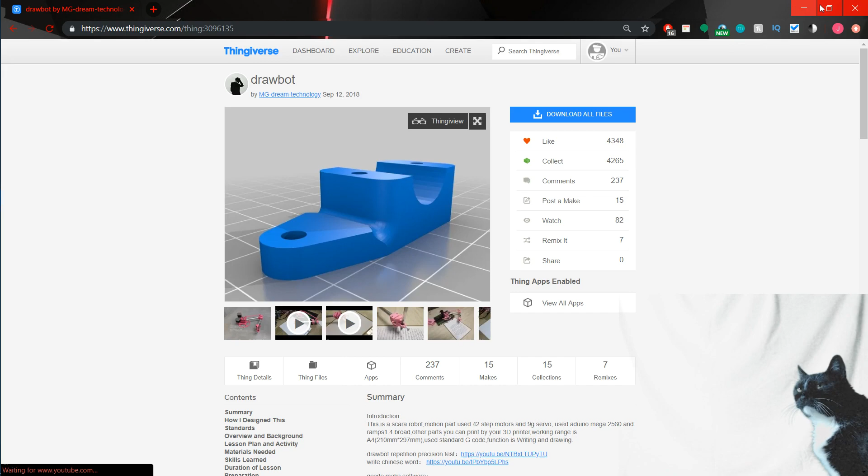And use it to do manual computer input to wipe computers automatically. I'm gonna have them click into a system. It'll know what type, what size they are, all that stuff, and then do the whole process. Let me get this out of here. Oh actually, I was gonna show something. Yeah, so that automates away a good part of my job.

So this part here, I printed most of these parts already, and these are actually printable on a smaller printer, so that was really nice to be able to get that done. I did not print this base part because I'm going to make a specific base to fit computers to slide them in. And then I wanted to make this more 3D printer friendly.

Can this be like a nicer... that's not much better. I wanted to 3D print these parts here because I didn't want to buy a pipe and then buy a saw to cut the pipe or anything like that. I just wanted to print the whole thing.

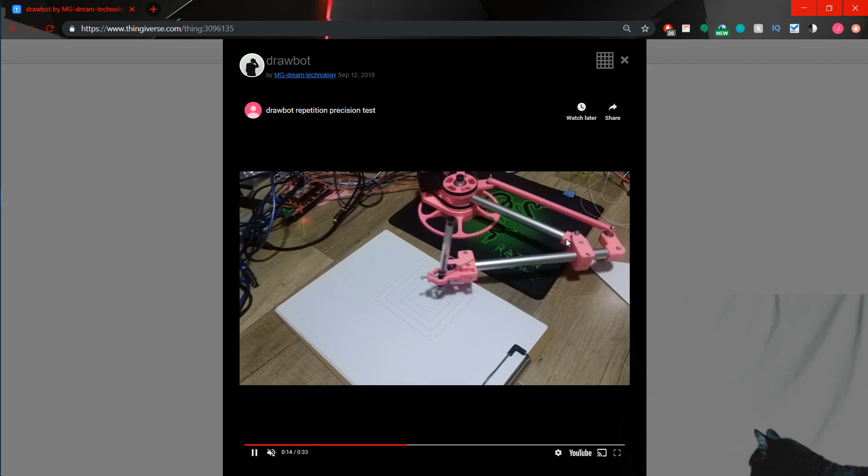And if I just redesign more of it, I probably can't do this. If I design more of it, I'll design it with less screws that are different sizes. There's like 10 different types of screws that are different sizes in this contraption here. So this screw and this screw, I just got the same size. This one, I guess that's one size, but I believe that they redid how this works.

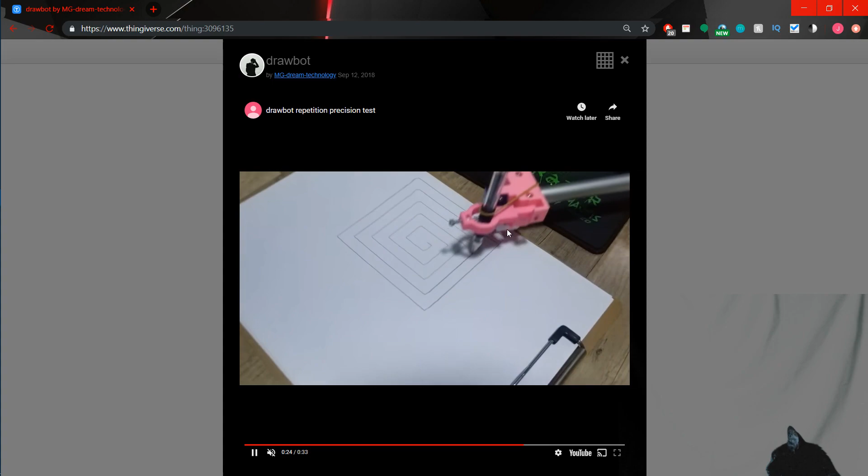So that it pushes down on the pen and is kind of like a better... yeah. So this one, it's got kind of like casters that it goes up and down in, and I think that would be better to press the keys on the keyboard. I might even redesign this entire part here, so we'll see.

But tonight I really wanted to do the arm bars. So basically I printed both of these already. One of them is 200 millimeters, one is 170 millimeters, or whatever. I printed those, but it looks like these joint pieces here and joint pieces here, they slide into the aluminum, so the inside of those has a certain tolerance that I was not aware of. I thought they bolted onto the sides or something. I didn't really understand how those worked.

Are all these the same picture here? So this part here has to be flared out, and we're gonna make that, and then I will print it shortly, and of course post on Instagram once I have that printed.

So let's get started. Let's do a sketch. We're gonna pick our plane. So what we're gonna do, do I remember how to do this? Let's do none of that stuff. Sketch line. Okay, if you could see this drawing on this iPad, you would laugh. It looks like a Y shape, so it almost looks like a slingshot here.

Okay, so we want to start with the midpoint here. We want to go out 7.5. Okay, then can we grab this guy? No, we want a repeat line. And we'll go here. And we want to do, so the full length is 200. We want to flare it at 20 millimeters. And so let's do 180.

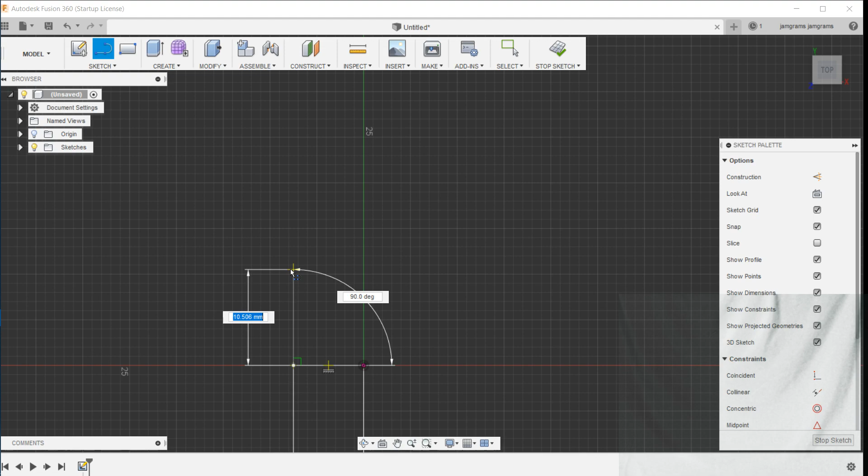Okay, so that should be good there. Oh I forget how to... oh yeah, okay perfect. Perfect, so that's 180. We're gonna rotate this around itself, so don't worry about any of that. Okay, so what did we need to do next? We needed to go up 20. Can we just repeat line here? What's going on?

20. And then what we want to do is flare this out, so that the inside is 12 across. So let's see, what's the total? So I wanted that to be 4. So that's 16 wide. So we need to do... can we just do 20 wide? Does that make sense? No, that would kind of look bad.

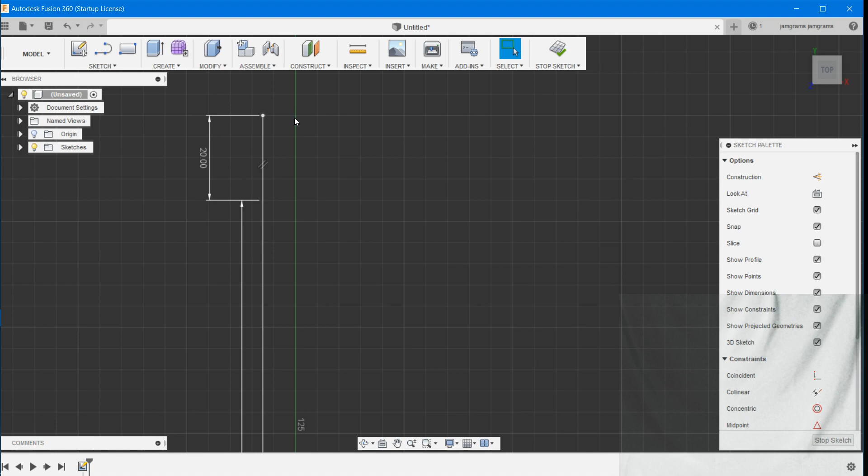That is not what I wanted either. Well, can we do a line? Yeah, let's do the inside.

So that's 7.5, so we need to do another line here. Repeat line. Then we'll go here to here, and we want half of 10, so that's 5. So then we want another line, then go up 180. Okay, then we can get a look at what's going on here.

I think I need to turn measurements off. Where's the view? I changed the view. Show dimensions. Okay perfect, so I don't need that yet. Oh, nope, nope. So what are we looking at?

So this is where it would flare to 12, so it just flares out 1. That's not actually that crazy. I wonder if we could get away with 12 internal diameter and 15 external diameter. I wonder if we get away with that, because then I'm not going to have to flare this at all, and we could just...

It seems mighty thin, so let's repeat a line. Oh, that's not what we want. We just want a line. Okay, and we want that line to go well, 45 degrees, right? But... 0.7, 1.5.

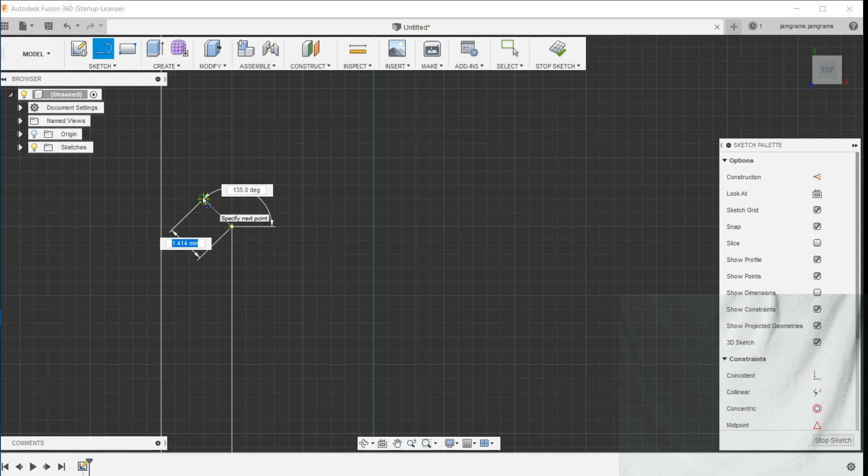So then that will be 13 millimeters, right? Because we're going from 10. So we really want 1.5. Really want about 1.

Can we get... interesting, I did not suspect we would have this issue. Because I didn't do much calculation beforehand either. So that one is 2.5 on each side.

What? Hold on. So my original... so what's my spacing there? I love how I turned off the dimensions. Okay, so that's 5.

So that's 2.5, the width of the pipe here. Not sure why I need to beef it up so much on the other side. So let's just try and flare it from where it is. Because that's 7.5. How about we

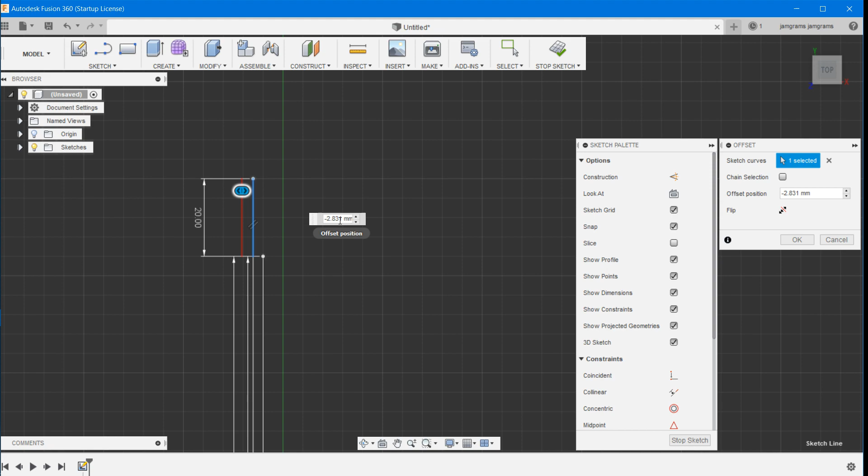kind of just offset? Is that O? Yeah. Let's go this direction, and we want... stupid iPad, shut off. We want it offset by, I guess, 2.5, right?

Because that'll let us go from here to here on a 45, and then we can go here to here on just the same, I believe, if that makes sense.

Now we're not offsetting, we're just gonna do a line. Now we're gonna connect, 45. Can I tab to the, yes, look at that, 45. And we're gonna turn dimensions off for a second.

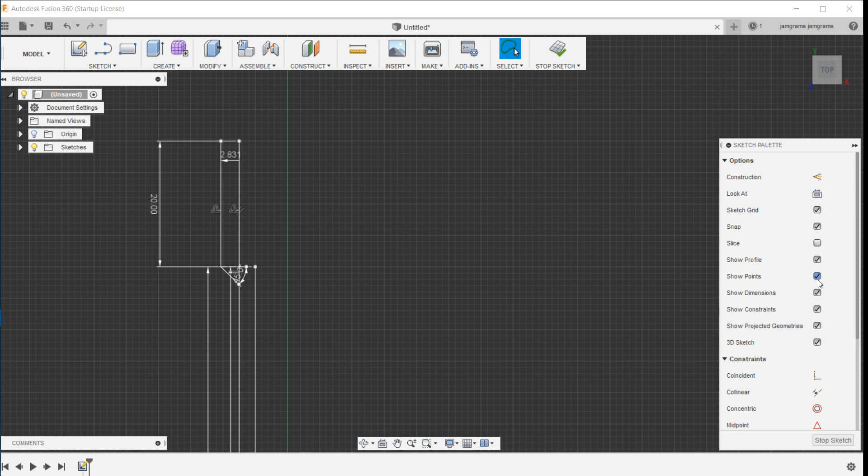Okay, so let's just go O for offset, take that one, oh. Wait, does that not count as a whole separate line? Or cancel? Okay, that's fine, so we want to offset this.

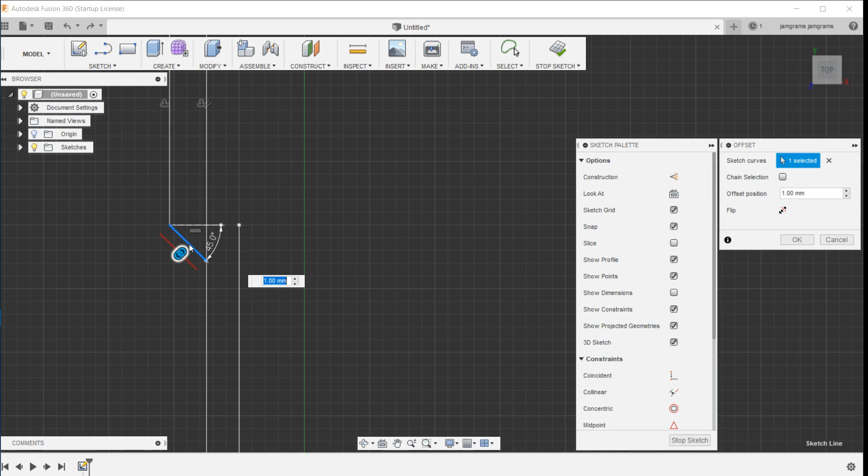Oh beautiful, is that, what, 1 millimeter? 1. Oh, I think we wanted -1. Let's offset. -1. Enter. Interesting how that doesn't line up.

Oh, maybe because this isn't. Yeah, it was, I wonder how this works. Oh it does not. Let's just do a new line and then do this. Tab.

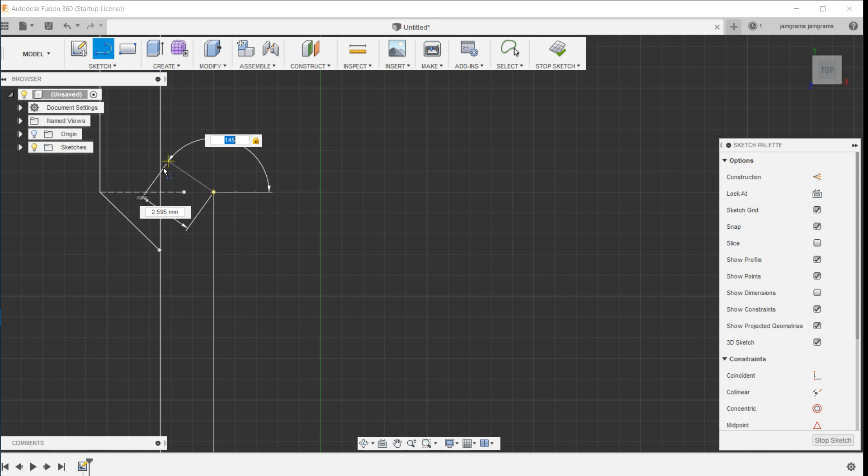145, right? No, 135. Because math. And then can we just connect it to the, woo! Hopefully this actually works correctly.

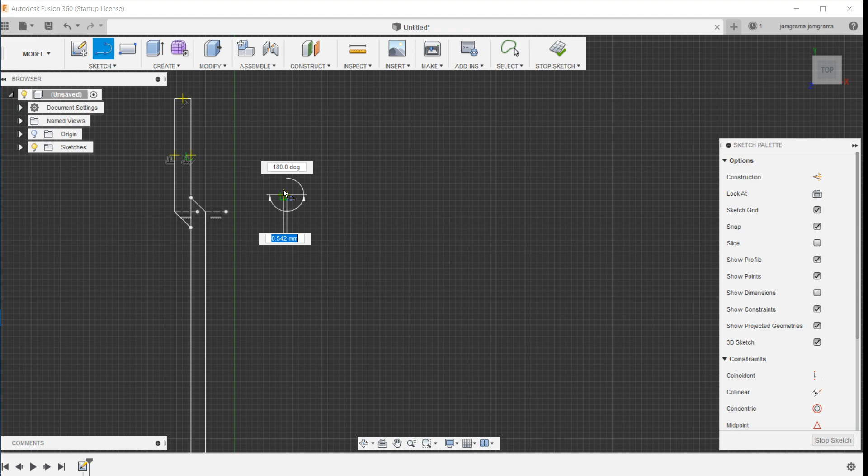How do I cut out this section here? That's an interesting question. Or do I not need to? Let's close this line, this end off here. Oh. Maybe we can just forget about that ever happening.

And just make it a solid object before we get too carried away with making it more complex. So we want to delete that one. Delete that one. Okay, so let's turn our, why is it showing dimensions? Okay, I need to do another line here.

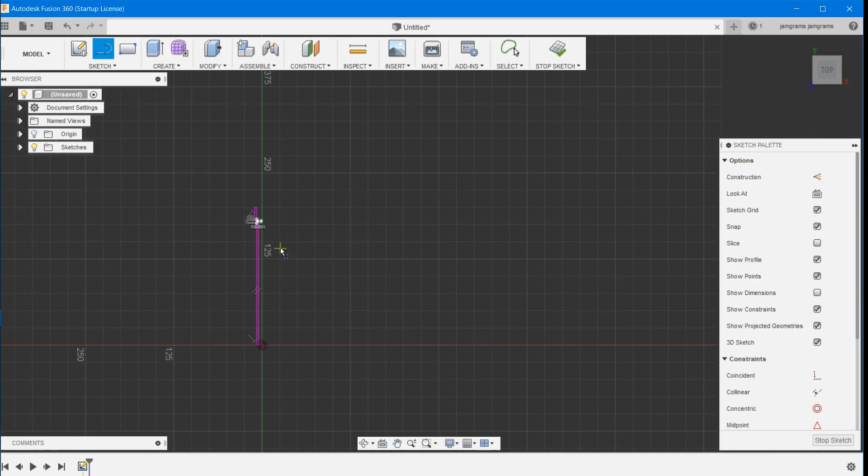Okay, and then is it a solid like thing now? The real question is, is this gonna 3D print correctly? That's the big thing I'm worried about, it breaking. But you know what, I'm gonna design it kind of thin now, and then I can beef it up later. That's totally fine, I think this is just the simplest way to do what I'm trying to do here.

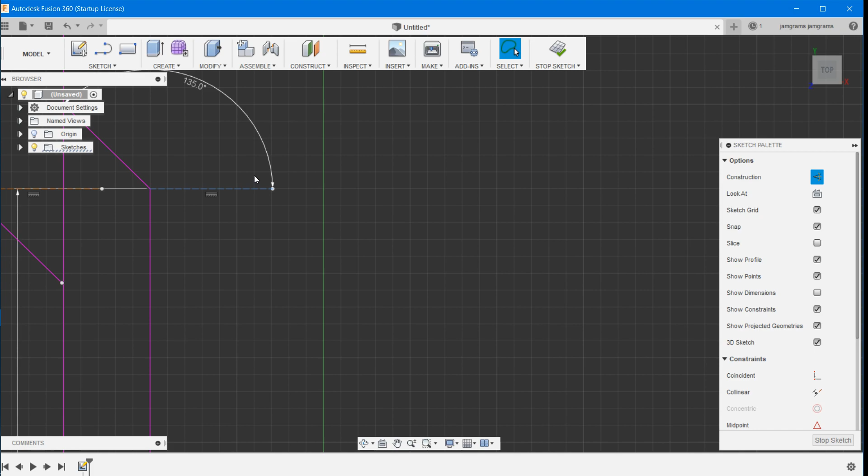What am I? Let's delete that one. And can we delete that one and that one? That's not what I want. I think what I have to do would be to draw a whole other line there.

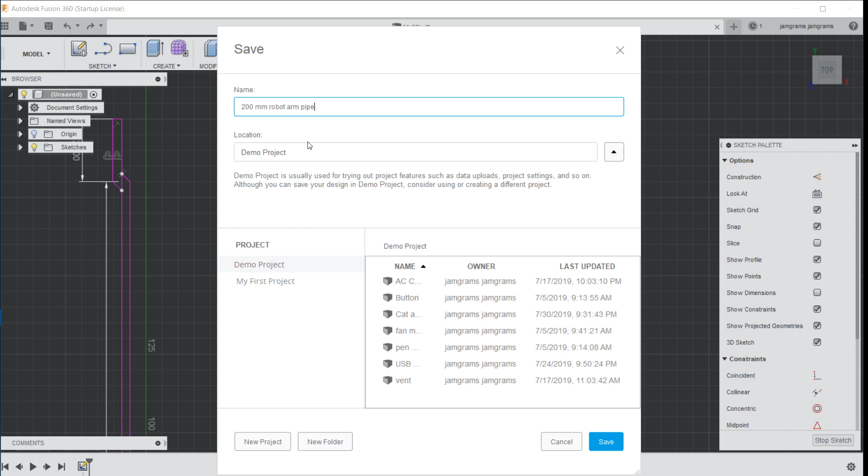Okay, so we are going to save as. Can I not save as? Is that not a thing in Fusion 360? Okay, so we're going to save this as 200 millimeter robot arm pipe. Okay, now I feel like we need to be able to save as to do the next part.

Well, we can always go back and edit that one and say this is something else, right? That's a thing. We'll export it and then work on it. Nope, I want to select the whole thing. Can I do Control A? No, that is not a Fusion 360 thing.

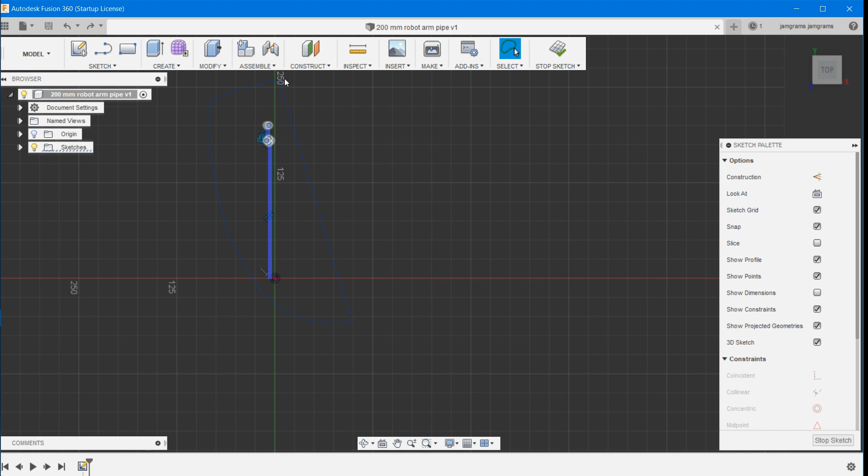Okay, that's the weirdest grabbing. So I want to modify. We want to rotate... create, revolve. That's what we want.

Full rotation. Operation new body, yes. Profile select. Axis, this axis. And can we select the whole thing here? Are we doing it? Is this how you select it? New body.

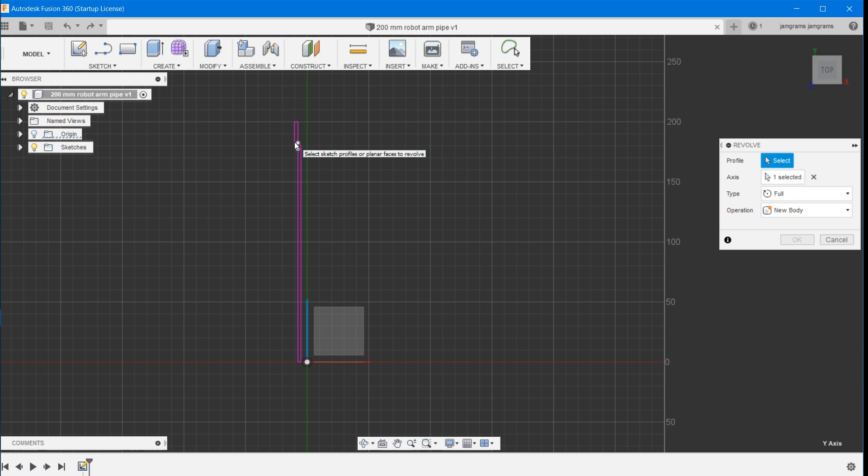I'm super confused that it's just not working. I feel like this is causing problems here. Okay, so we'll step back one.

We're gonna cancel. I am extremely thirsty. I will be right back.

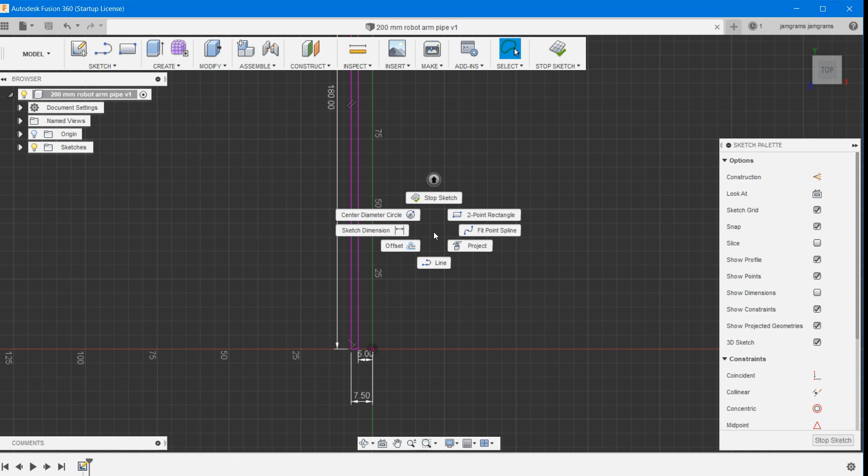Okay, we're back. So what we were gonna do was make sure that our lines that we have... this is extremely difficult to keep on the screen at the same time without making it too tiny.

So we wanted... can we drag this? Oh boy. What? Oh. Actually, that's kind of a problem.

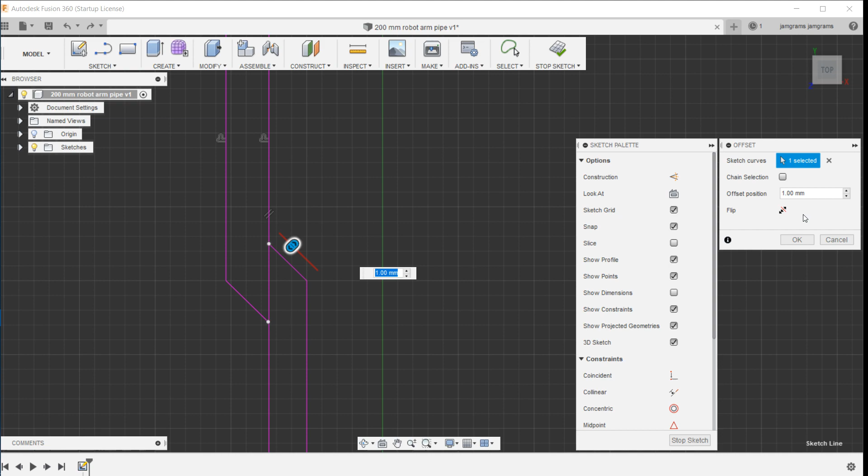Because we needed to make this go over up here. So how do we... whoa. I'm gonna try and offset this because that makes the most sense. Actually, it doesn't because... weird.

This is way easier to design in... I designed the original in Tinkercad. It was way easier. It was just a tube with a hole in it before it got all complicated.

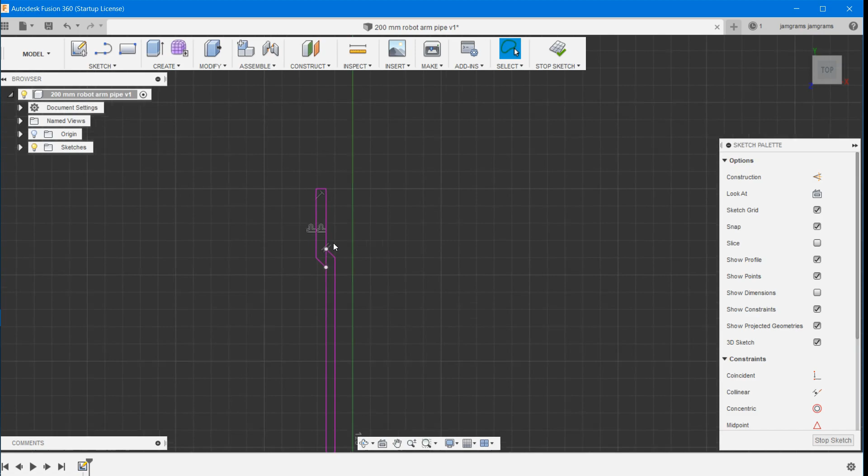So I really don't know how to do this part without... because this is 180, which is where the flare was supposed to... no, I think that's okay. But somehow we have to...

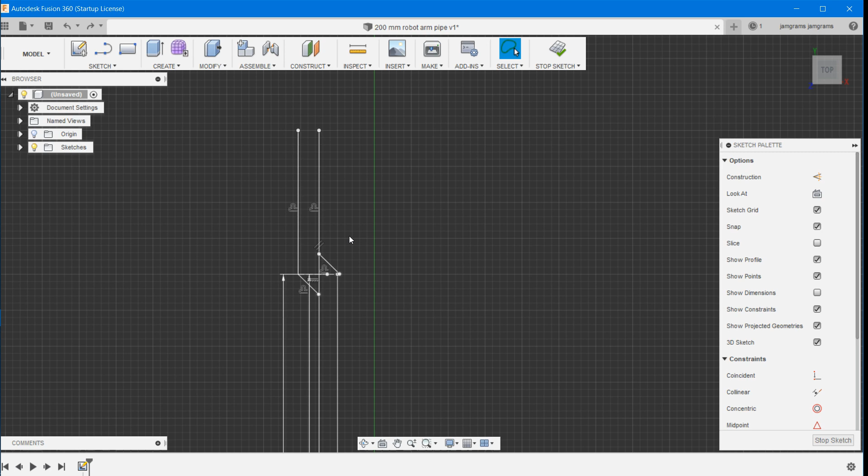What does this do? That is so weird. How does it think we did that? Okay, we're gonna have to undo some stuff, because none of this makes any sense. Okay.

So we need to... is this a line? No, that's a measurement. We need to get that out of here. Oh, okay. So what we really need is...

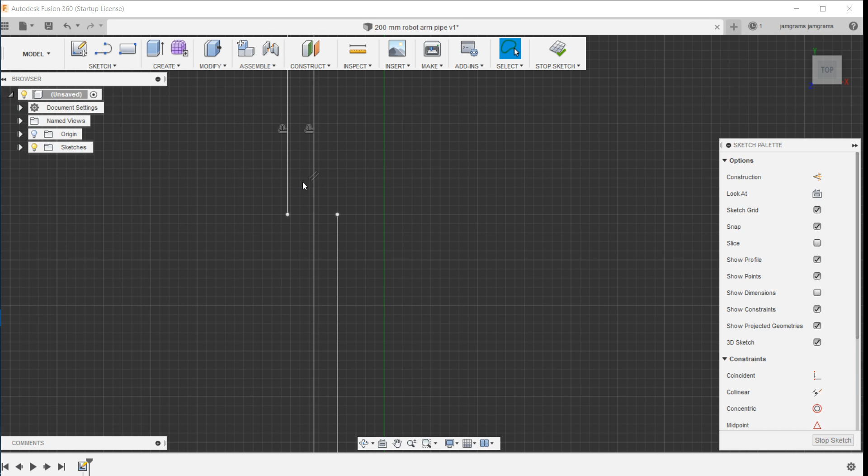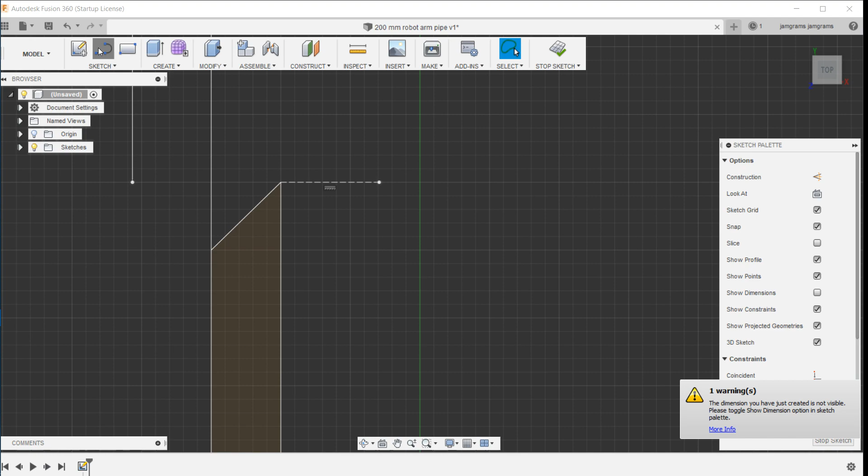To make a 45... I always forget to do extra lines. I want to do 45, well, 135. Okay. And then what we need to do is another one that starts here and does that.

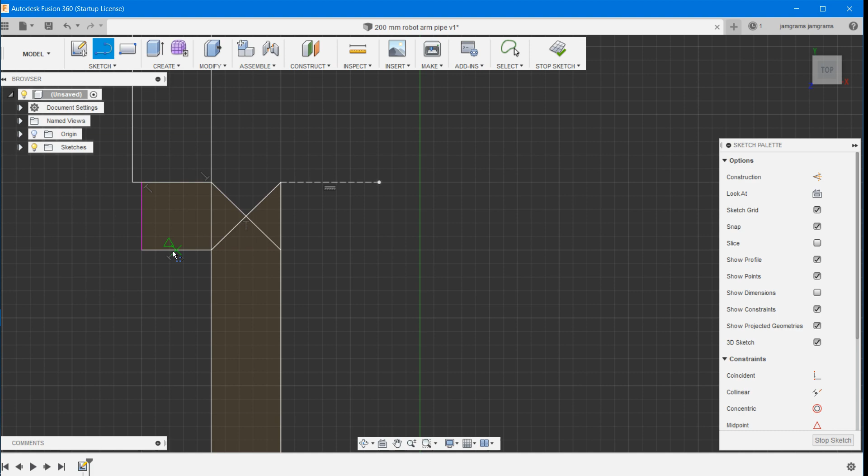Then what I think I need to do from here is make a box. That's not a box. We're gonna go here because... how big is this? Let's see. It's not even gonna show me the one I'm looking for.

It's almost 3, which is okay, I think that's what we can deal with. So let's keep making lines. We'll do our crisscrosses, because then we'll have this here left over once we're done. I always forget that there's extra steps in that stuff.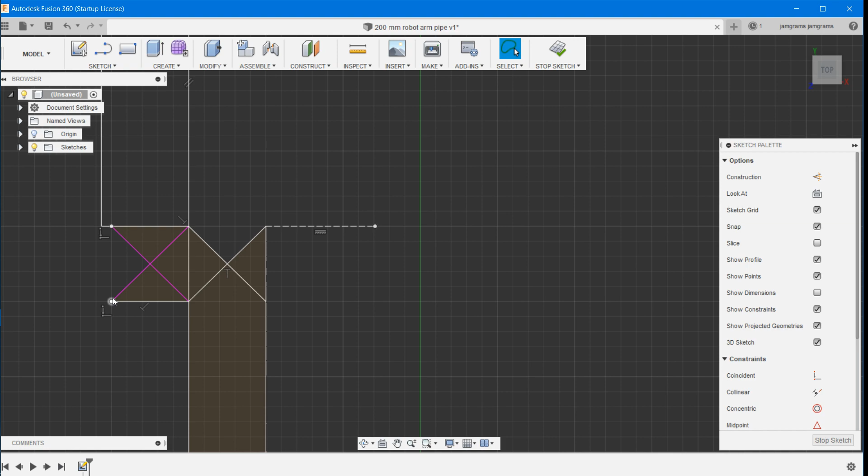So let's deselect everything. Can we just delete this line and this line and this line and this line and this line, because this stops at 180, which is where it needs to be already flared, was the idea.

So this is actually what we really needed to do, and I always try and skip steps, but can I drag this down without breaking absolutely everything? No, let's make another line.

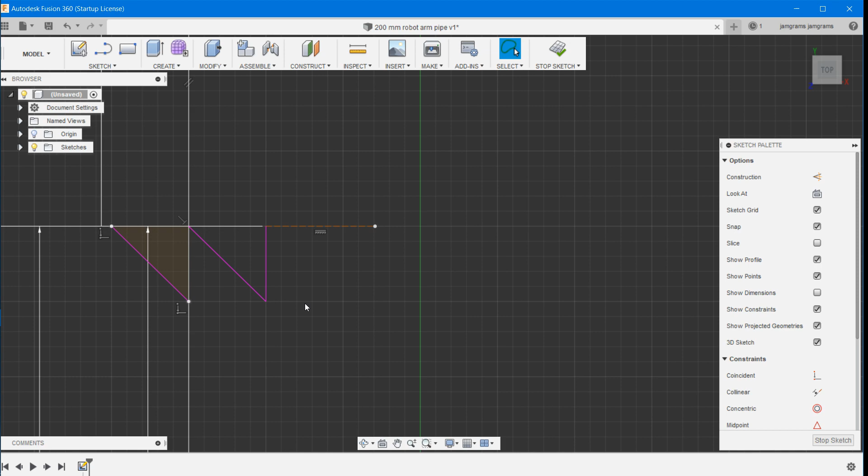We delete that. Interesting. So let me delete this, and that shouldn't have been deletable. Then we make another line that goes 180.

Dimension you created is not visible. I think that's because it's... excuse me? What? 180 and 20. Yeah, okay. So that's good. I think we have our part, right? Once we...

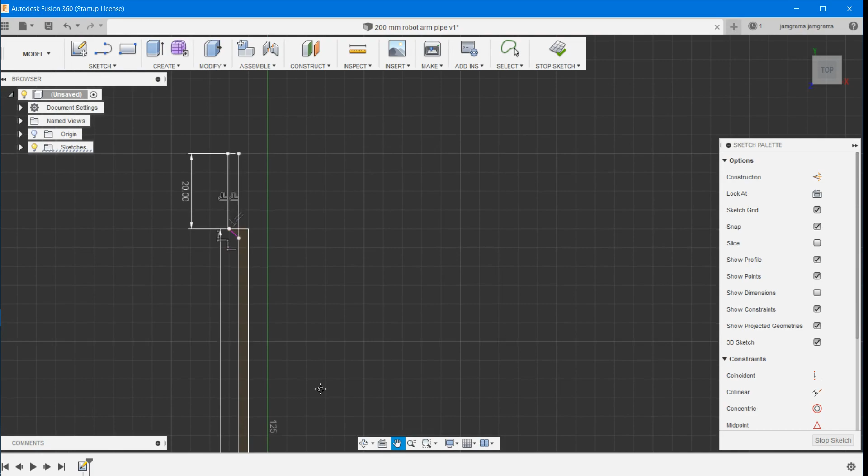What? How would that make sense to have that be a thing? Okay, I'm going to delete this one. And now we're just going to do a line that goes 180.

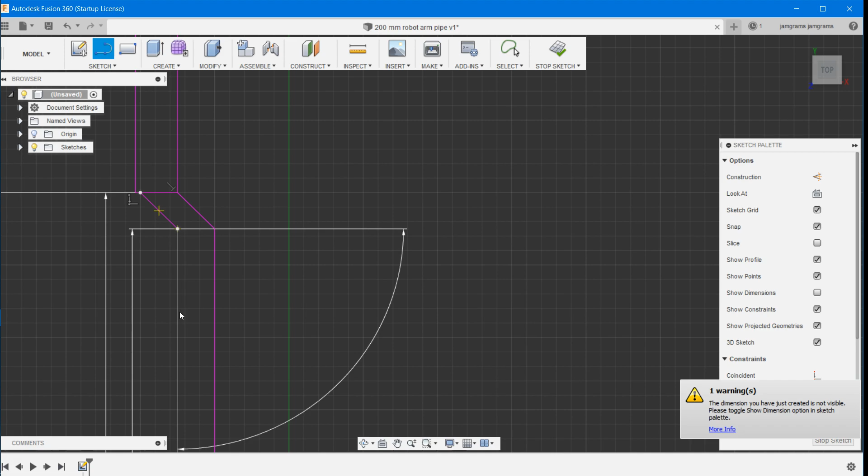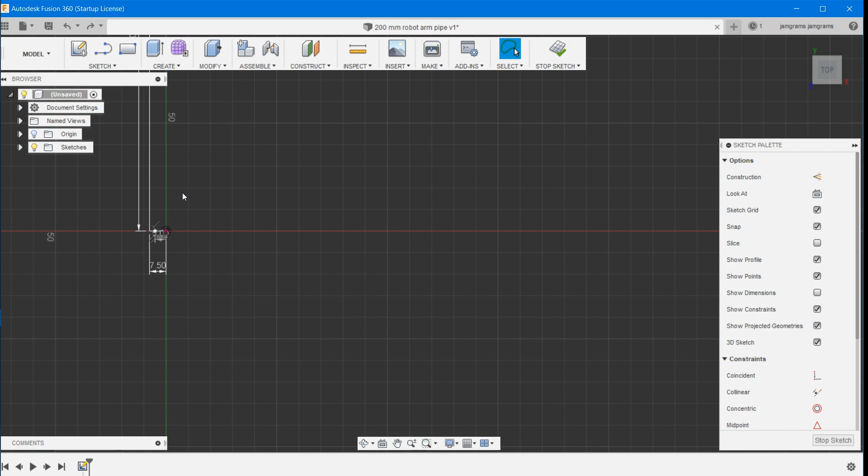Right? And then for some inexplicable reason, it goes past the end. Because, oh, I'm not subtracting the... okay. This is the problem with making stuff really tall.

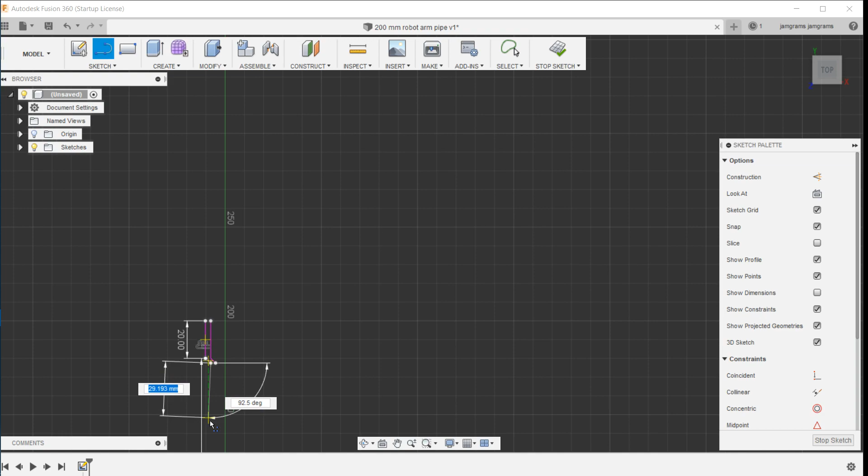Delete this one. Yep, and then this is a separate line. Right, okay, so we want to make a line. And we really need it to connect down here, so we kind of got to draw it like that. Yes, 90 degrees, okay, we want a line, 90 degrees.

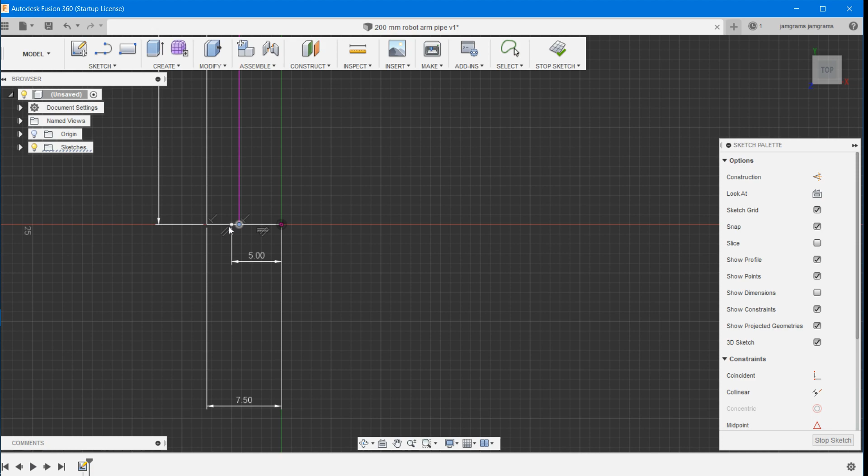Somehow it's 182. That makes less sense than, but what? Why would you decide just to... if this is messed up. No, okay, that's fine, right? It's not. Okay.

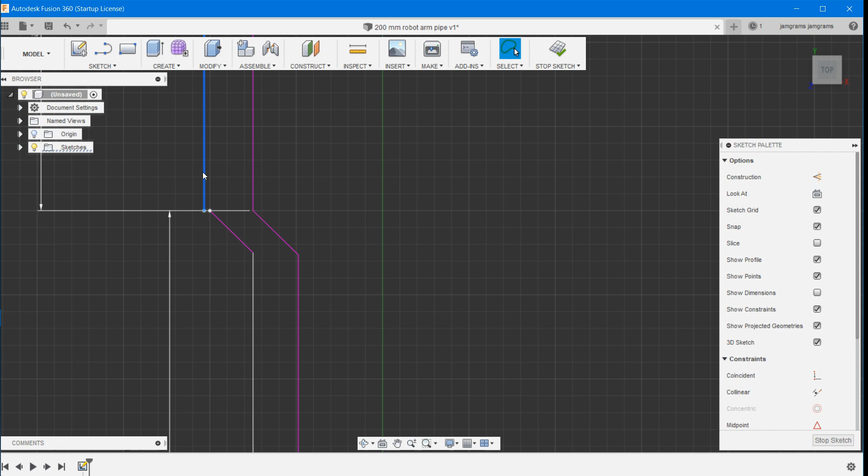So let's delete this guy, because that doesn't make any sense. I thought this would be way easier. I apologize, this is going to be a super easy, real quick. Yeah, just design a robot arm, you know, right quick here with just, okay.

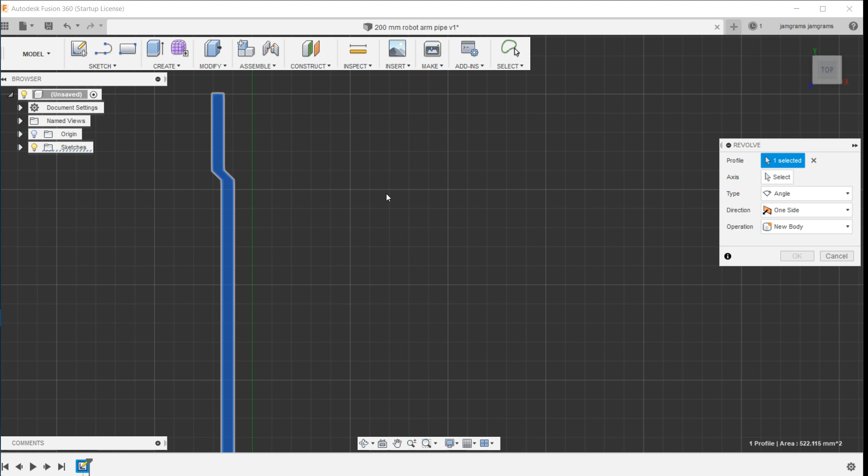Revolve. See, now it looks like it's supposed to. No, don't. It doesn't look very impressive. But it's a pipe. Well, it's not a pipe now.

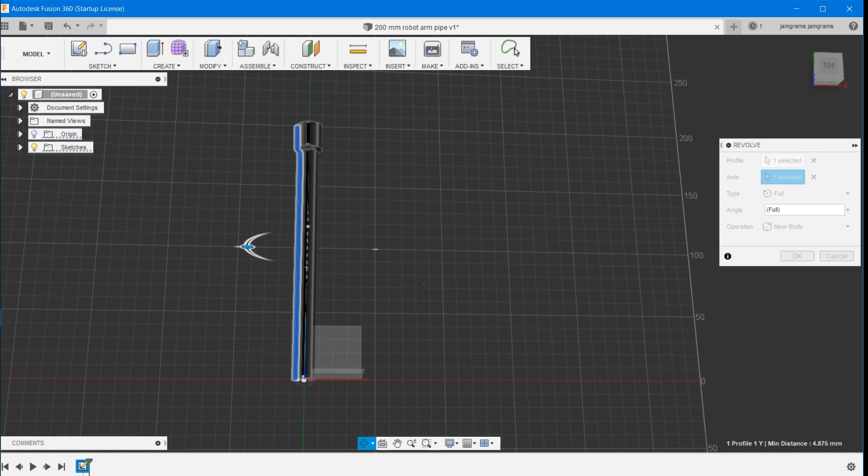That's not a pipe. This is a pipe. Yeah, boy. How do we rotate? We got ourselves our little robot arm pipe thing.

Cool. Now what we should do is, can we save as? File, save as, robot arm pipe, revolved.

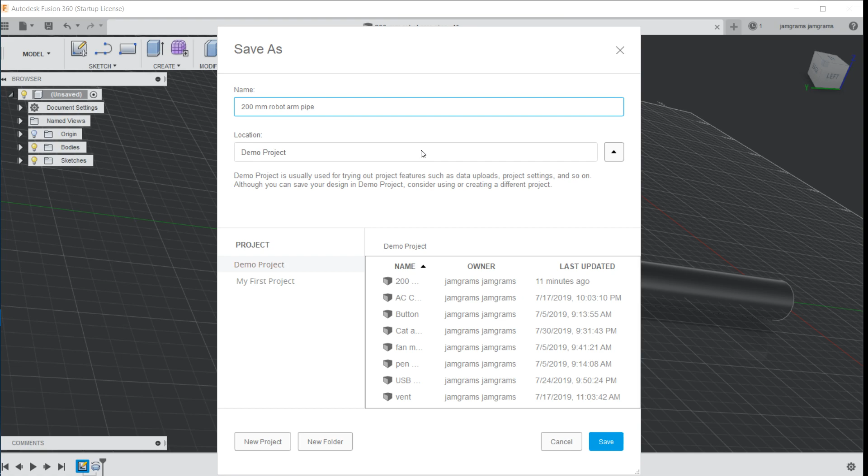Save that. Then can we step back one? Like, can we undo the... what? I don't understand what is happening. Let's rotate it back to normal again. That's not what we had before. I actually really like how that pipe looks. I think I turned some cool settings on or something.

So what we need to do is simply shorten this to 158. I don't know how difficult or easy that's going to be.

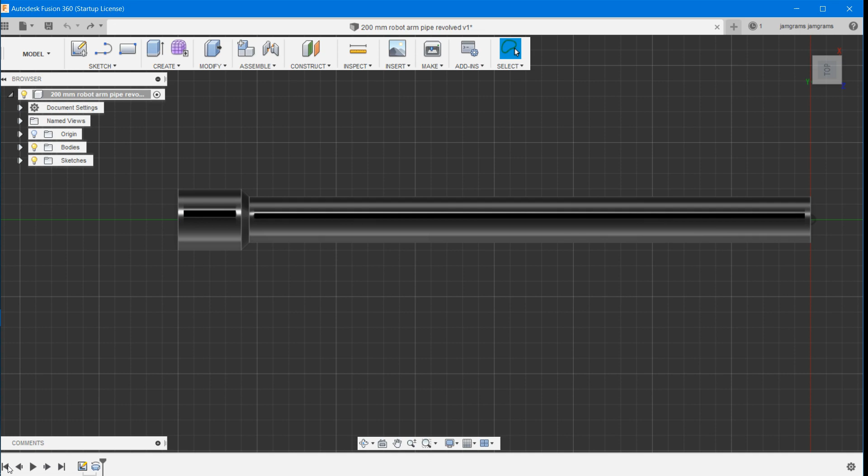I'd kind of like to be able to... Oh, yeah, let's unrevolve. Here, sketch. So then what we need to do is...

We're in the sketch, right? Can we... Let's get that out of there. Okay, so what I really want to do is grab this. Oh, maybe I messed up and it's not a pipe. But I want to offset, so we're offset.

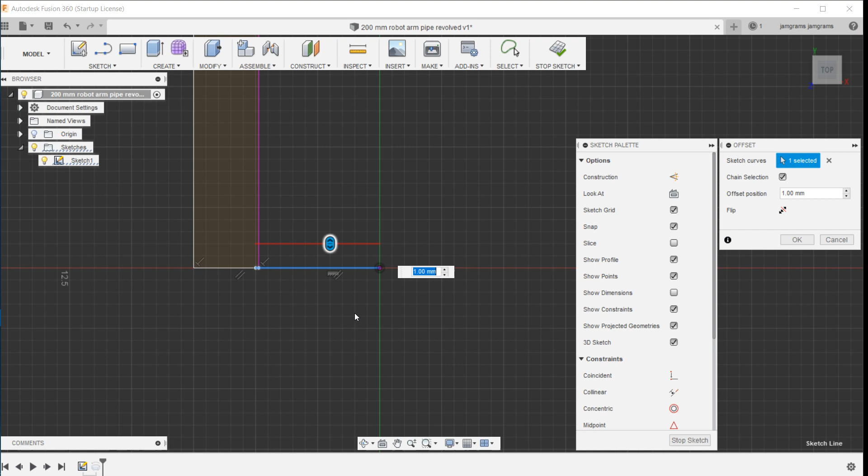Okay, I'm actually going to delete the, let's cancel. I'm going to delete this. What?

And let's close this line, because I think that's where we were before. Okay, cool. So now what we want to do is... Actually, before we modify anything at all, let's...

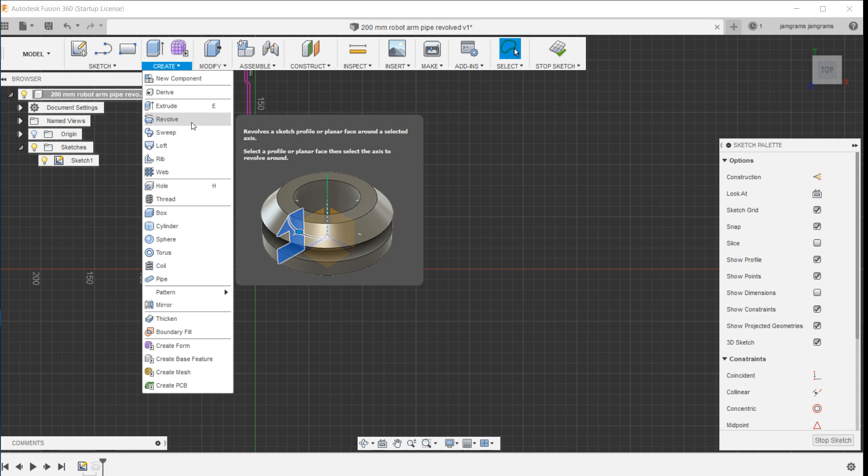Wait, is the body still there? No, let's re-rotate it. Or revolve, I keep saying rotate. Full, yeah. That thing. Axis here.

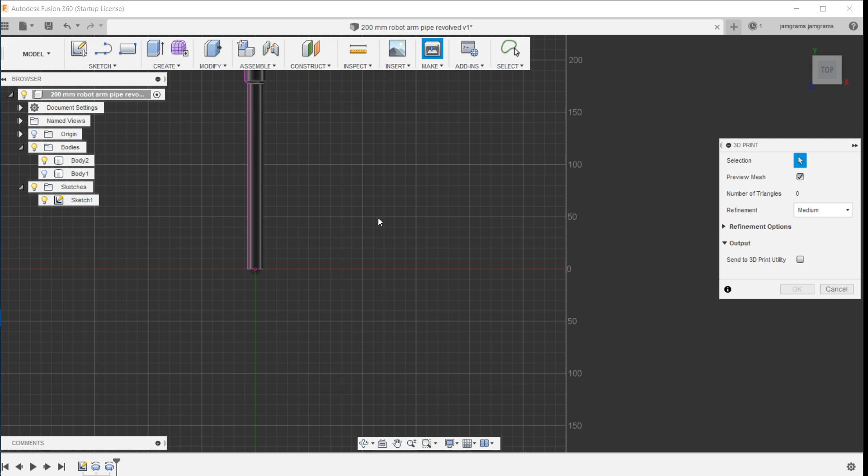Okay, so what we should do is, right, 3D print, yeah. Okay, medium, let's not send it, just select the thing. Okay, revolved V1, sure. We'll save that one.

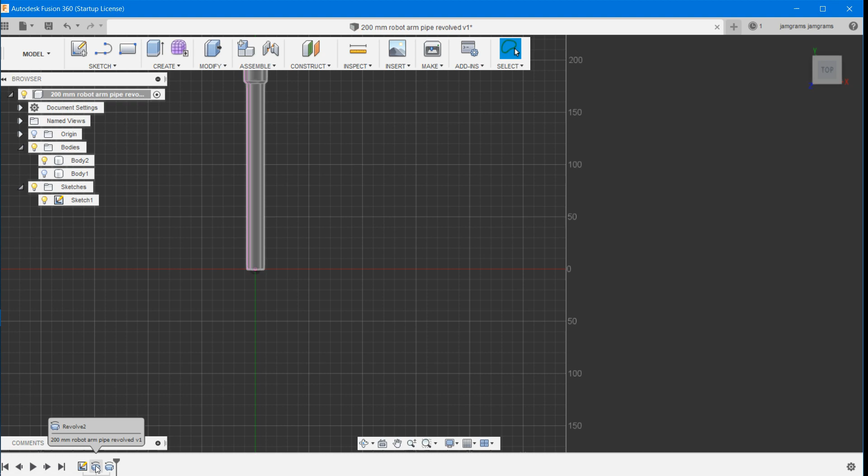Then we shall have, see, I printed it earlier too. So we're going to save that. And then I'm going to, hopefully it doesn't save it as two separate bodies, because they're two separate revolves. Because that could be a thing. We'll check it out if the slicer starts acting super weird.

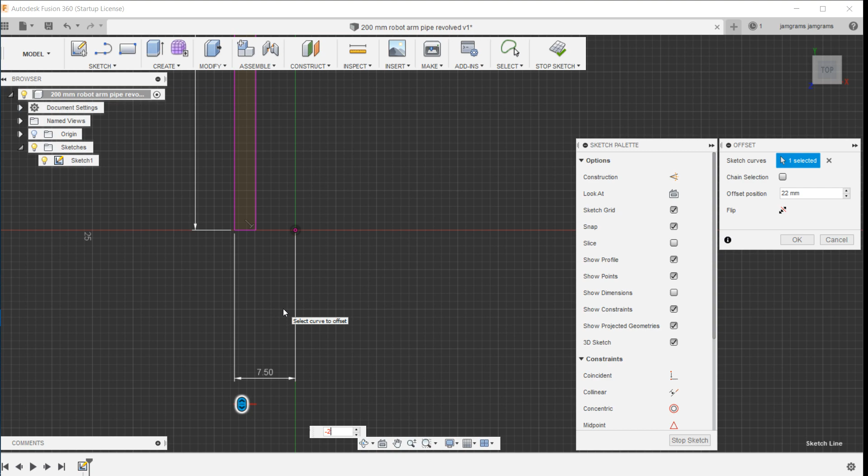with O. Where did it go? This bad boy. What? No, just the one piece, man. Okay. Offset that. Yeah. So we want to go 22. So negative 22 somehow is up.

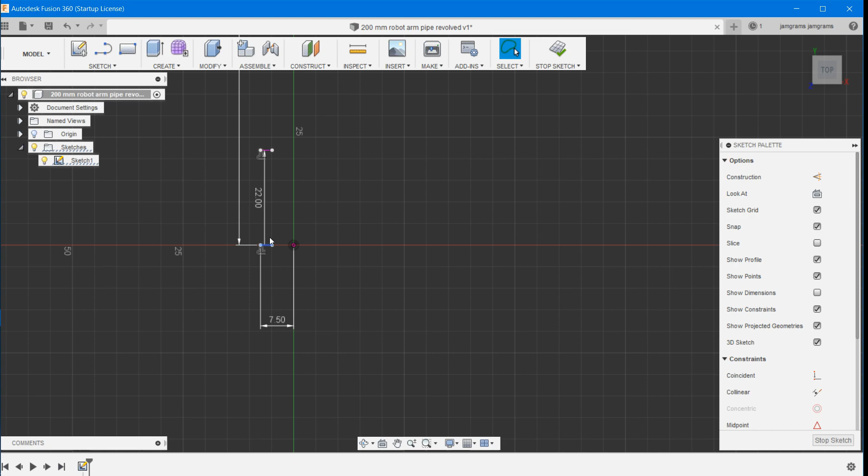Okay, and then what we want to do is somehow, okay, I guess I'll just delete this whole line. Someday I'll learn this better, but I'm just learning it to accomplish a task. Building a robot arm. I don't need to go get a degree to build this robot arm. I just need to know what I need to know, and that is it.

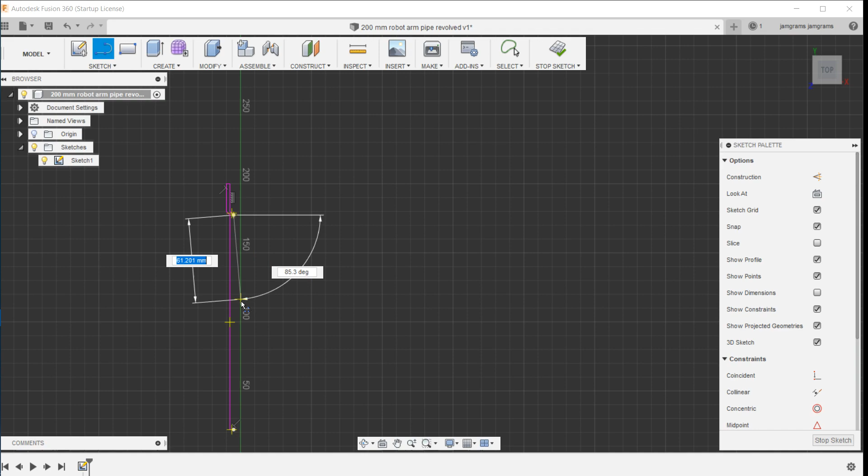Cool. We'll go straight there. We will do another straight down to our pal there on the bottom, and that is wrong.

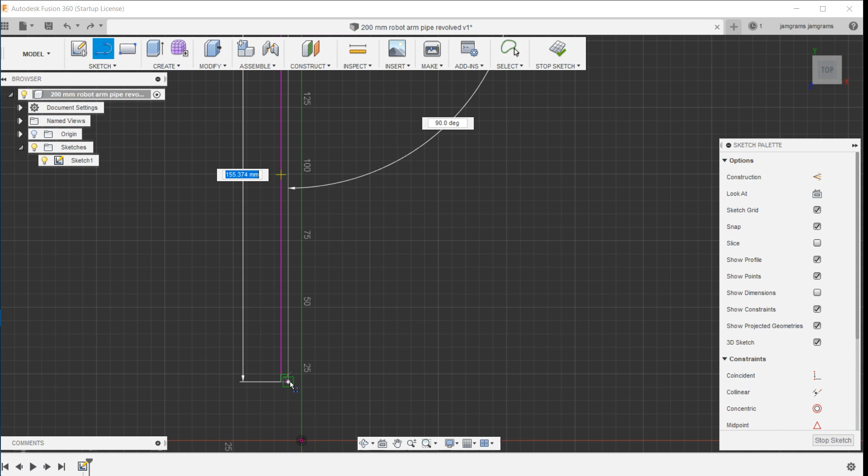Okay, 90 degrees. Yep. Okay, so now it's a solid thing. Cool. So if we show dimensions real quick, that's still 22. The rest of the dimensions I deleted or whatever. Can we get them back? Nope. Okay.

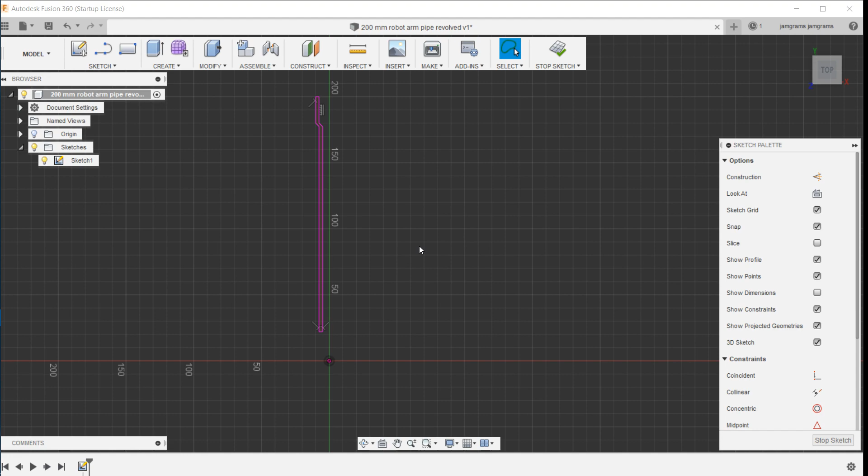So we should be good. I'll check my dimensions before I print it. But let's do our rotate here. Revolve. Someday I'll remember what it's called. Okay, so that's selected. Let's select our axis right here. And we go, okay, and we have another pipe that's slightly shorter.

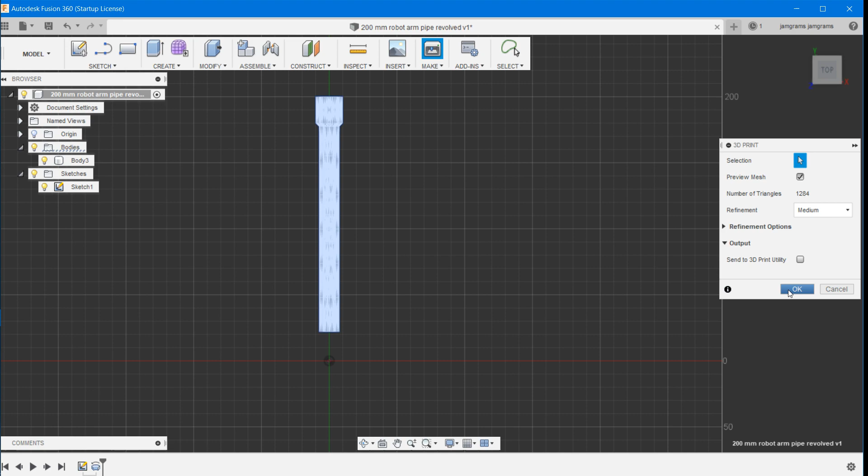So let's go 3D print this, obviously, the thing. All right. We'll save it as V2. Oh, but this is the 160 or 170.

Because 180 minus 20 with the... Cool. And while I'm thinking about it, I kind of want to... Can I just Command Z back until I have the other revolved here? Okay, so I just want to revolve this thing by itself. Because I think I might have grabbed 2 of them last time.

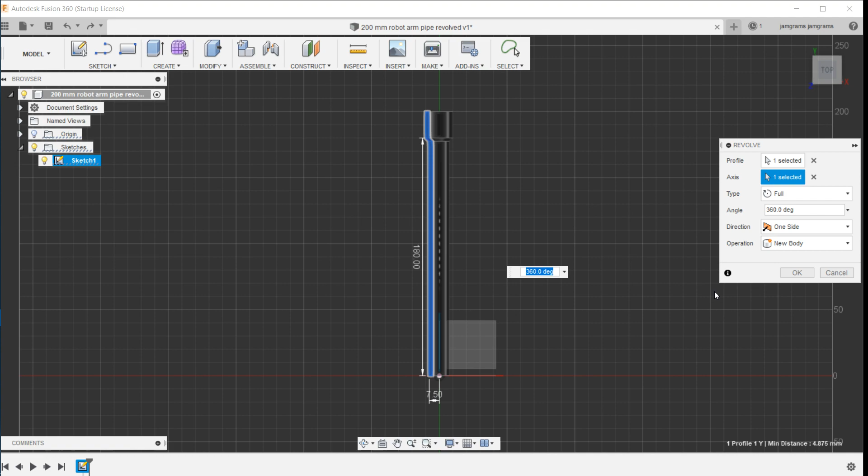So this is the long pipe. Cool. So now let's go 3D print. We'll go, yes, we want to select the object. Just body 3. Let's call it 200 millimeter safe. Print. Maybe.

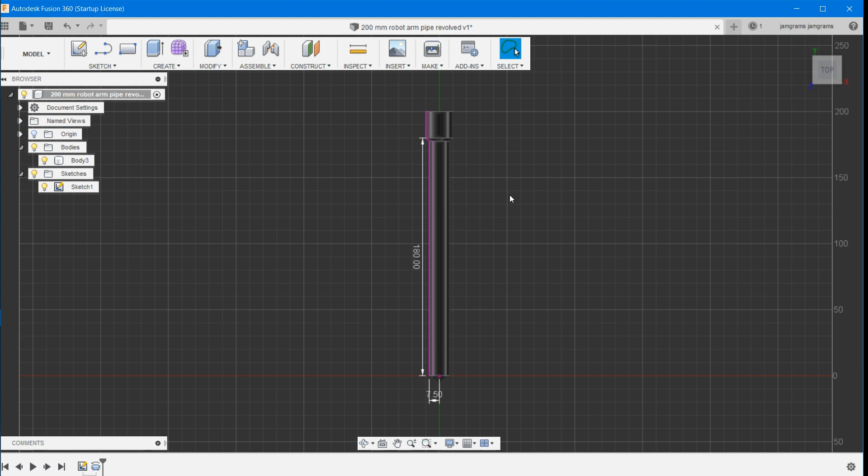Okay. So I think we're good on that for the night. I'll definitely have more assembly of the robot. I'm waiting on random parts from, what is it? Bolt Depot or Screw Depot. I forget. It might be Bolt Depot. You can order like individual screws for stuff, which is really awesome.